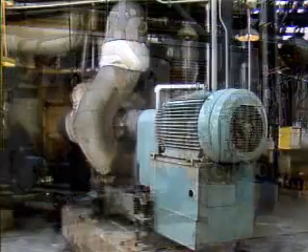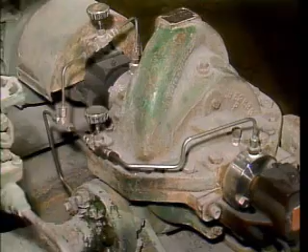Plants use many types of pumps to move process liquids. One of the most common types of pumps in use today is a centrifugal pump. A centrifugal pump uses one or more impellers to create a centrifugal force that pushes the process liquid through the pump. While there are a number of different types of centrifugal pumps, they can be grouped into two basic categories: single-stage pumps and multi-stage pumps.

Centrifugal pumps use centrifugal force to move liquids. Centrifugal force is the force that exists when an object or material moves in a circular motion. This force causes the object or material to move outward, away from the center of rotation. In a centrifugal pump, what moves outward is the process liquid.

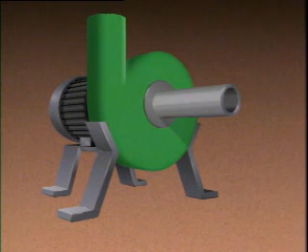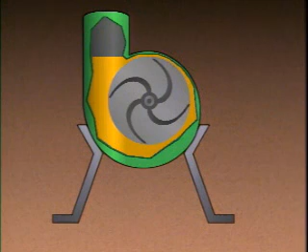We can see how a centrifugal pump works by using this simplified illustration. All centrifugal pumps have an inlet, a casing, and an outlet. Inside the pump's casing is an impeller. It has a series of curved vanes that extend out from its center. The pump's casing is designed so that the area around the impeller creates a gradually widening spiral channel. This widening channel is known as the volute. Since this pump has only one impeller and one volute, it is referred to as a single-stage pump.

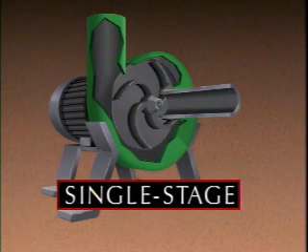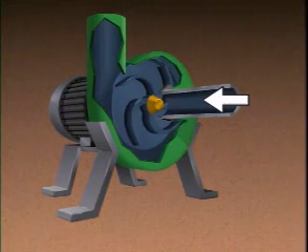During operation, a driver rotates the impeller, creating a centrifugal force that throws the process liquid outward into the volute. The outward movement of the liquid causes two things to happen. First, it creates a reduced pressure area at the suction eye of the impeller. This area of lower pressure draws more liquid into the pump and provides a constant flow of liquid. Second, it causes the liquid to gain speed. This happens because as the liquid is forced to the outside of the rotating impeller, it must move faster to keep up with the impeller.

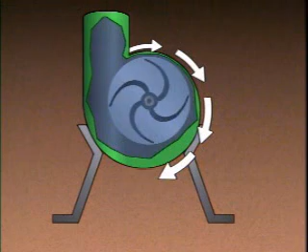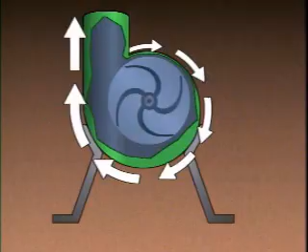As the liquid flows away from the impeller, it spreads out to fill the volute. The expansion in the volute causes the liquid to slow down and its pressure to increase. The increased pressure moves the liquid through the discharge of the pump and then on through the piping systems of the process. One way that centrifugal pumps can be categorized is by the way liquid flows through them.

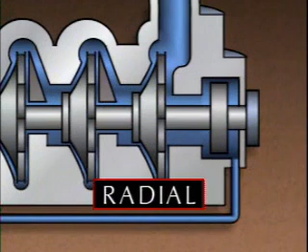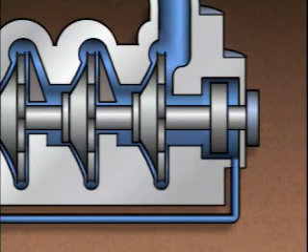Three common flow path classifications are radial flow, axial flow, and mixed flow. In centrifugal pumps that have a radial flow design, the impeller causes the liquid to make a 90-degree turn and flow outward, or radially, from the suction eye to the tips of the vanes. A radial flow pump takes advantage of the maximum amount of centrifugal force that the impeller develops. Generally, radial flow pumps are capable of higher discharge pressures, but they don't move as much liquid as other types of centrifugal pumps.

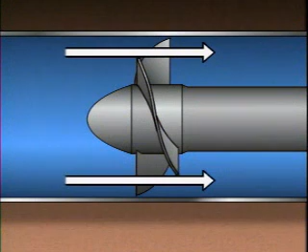In centrifugal pumps that have an axial flow design, the impeller moves the liquid through the pump along a path that's parallel to the pump shaft. In this type of pump, the liquid is moved mainly by the propeller action of the impeller's vanes. This impeller uses only a small amount of centrifugal force to move the liquid. As a result, the discharge pressure of an axial flow pump tends to be lower than that of a radial flow pump. However, an axial flow pump may be able to move large quantities of liquid.

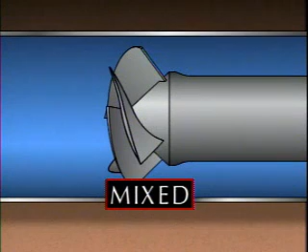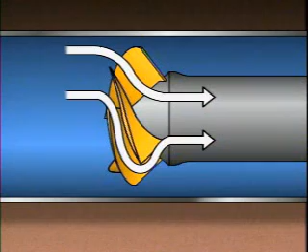Mixed flow pumps combine the characteristics of radial flow pumps and axial flow pumps. They use centrifugal force and the propeller action of the impeller's vanes to move the process liquid. For that reason, a mixed flow pump can develop a relatively high discharge pressure and still move a large quantity of liquid.

The driver, which is an electric motor, is mounted above the pump on top of the tank. Its shaft is connected to the pump shaft by a coupling. This pump shaft is much longer than those found on most other centrifugal pumps. On any pump with a long shaft, it's important to keep the shaft in its correct position.

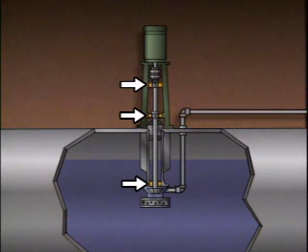So that the pump will operate properly, several bearings are used to keep the shaft properly aligned.

On this pump, there is no suction piping. Instead, the suction of the pump is submerged in the liquid being pumped. The suction is covered by a strainer, which prevents trash or debris from clogging the pump and causing excessive wear.

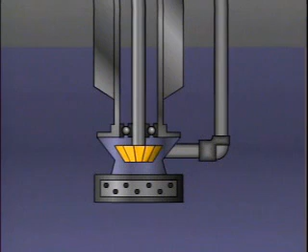The pump's impeller is also submerged in the liquid. This helps to ensure that the pump is always primed, meaning the casing is filled with the process liquid.

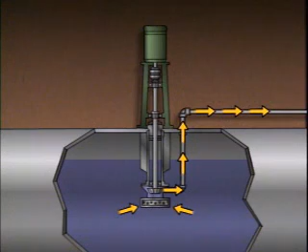During operation, liquid is drawn in through the suction and then pumped through the discharge piping, which extends up and out of the tank. All centrifugal pumps work by creating a centrifugal force. This force moves the liquid through the pump and increases the liquid's pressure.

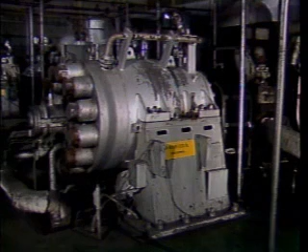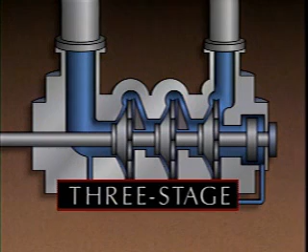In applications where large increases in pressure are needed, multi-stage centrifugal pumps are often used. A multi-stage centrifugal pump contains 2 or more impellers and volutes in a single casing. Here's a simplified cross-section of a 3-stage centrifugal pump. Each stage of the pump has its own impeller and volute.

In the volute, the liquid's pressure increases. Each of the first 2 volutes discharges into the suction eye of the stage that follows it. The 3rd stage volute discharges into the pump's outlet. So in this pump, the liquid flow path is from one end to the other.

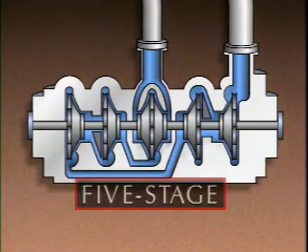This is a 5-stage pump. It has 5 impellers and 5 volutes. The first 3 stages are located here, and the 4th and 5th stages are located here. But as you can see, the liquid's flow path is different from that of the 3-stage pump we just saw.

In this pump, liquid enters through the suction and flows into the impeller of the first stage. This impeller has a suction eye on both sides and is often called a double suction impeller.

From the discharge of the first stage volute, the liquid flows into the second stage suction eye, then out of the second stage discharge and on to the third stage suction eye, and out of the third stage discharge to the suction eye of the fourth stage.

The liquid from the fourth stage is routed to the suction eye of the fifth and final stage. After the liquid passes through the fifth stage, it leaves the pump through the discharge piping.

Regardless of how the impellers on a centrifugal pump are arranged, or how many stages a pump has, the liquid's pressure increases as it passes through each stage. This creates a thrust across the impellers in each stage. This thrust, known as axial thrust, is caused by the difference in pressure between the suction eye and the volute.

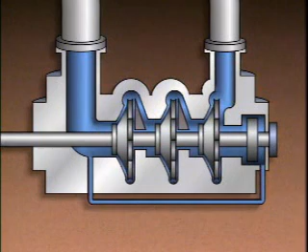Because there is a difference in pressure across the impellers, axial thrust is created, and it tries to push the pump shaft toward the suction eyes. In order for the pump to operate properly, the thrust must be offset.

On some pumps, the thrust is offset by using a thrust bearing or a device known as a balance piston or balance drum. On other pumps, the thrust is offset by the arrangement of the impellers.

This pump has a balance piston. During operation, some of the fluid leaving the pump flows along the shaft and exerts pressure against the balance piston. That pressure tends to force the pump shaft away from the suction eyes and reduces the total thrust. Any fluid that passes by the balance piston is returned to the suction side of the first stage.

Now on this pump, the arrangement of the impellers is used to offset axial thrust. Process liquid enters the first stage impeller from both sides, so the pressures on both sides of the impeller are equal. The suction eyes for the second stage and third stage impellers face in the opposite direction from the suction eyes of the fourth stage and fifth stage impellers.

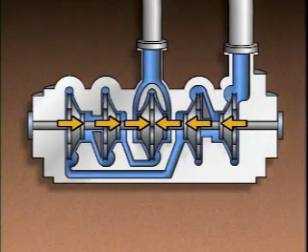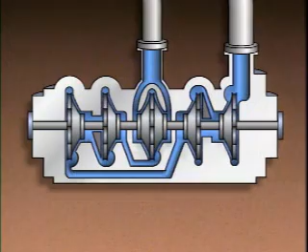The suction eyes of the fourth stage and fifth stage impellers face opposite those of the second and third stages. Since the forces caused by axial thrust are in opposite directions, they tend to cancel each other out. As a result, axial thrust in this pump is kept to a minimum.

In this topic, we looked at the basic operation of several types of centrifugal pumps, including single-stage pumps, vertical pumps, and multi-stage pumps. Now let's try some practice questions that relate to this material.

Inside all centrifugal pumps, an impeller creates centrifugal force to move liquid through the pump. Impellers can be designed in different ways, depending on factors such as the type of liquid being pumped and the amount of pressure increase that's needed.

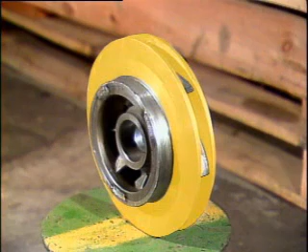The impellers used in centrifugal pumps can be divided into three categories: closed, open, and semi-open. This impeller is a closed impeller. Its vanes are enclosed by shrouds on both sides. The shrouds direct the flow of liquid between the vanes.

Closed impellers are often used with low viscosity or thin liquids. Liquids that are thick or contain suspended solids could clog a closed impeller. With those types of liquids, an open impeller could be used.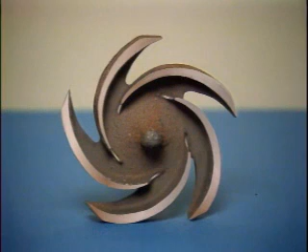This is an open impeller. As you can see, this impeller has no shrouds to direct the flow of liquid. While this design helps prevent clogging, it's less efficient at moving liquids than a closed impeller, since the flow of liquid is not directed between the vanes.

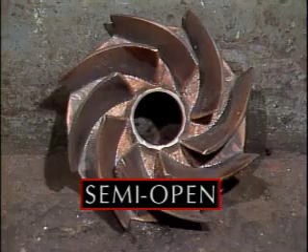Open impellers are used to pump thick liquids or liquids with solids such as slurries, and closed impellers are used to pump thin liquids. Semi-open impellers can be used for pumping thin liquids, since there is a shroud to direct the liquid between the vanes. They can also be used for heavier liquids and slurries, since they minimize clogging.

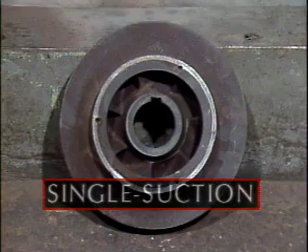Impellers can also be classified in other ways. For example, closed impellers can be further classified as single suction impellers or double suction impellers. This impeller is a single suction impeller. It has only one suction eye, so there's only one place that the liquid can enter the impeller.

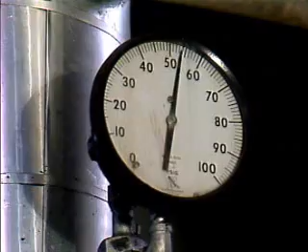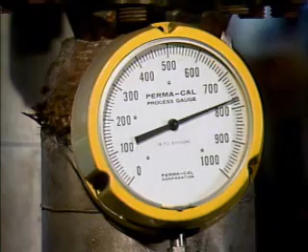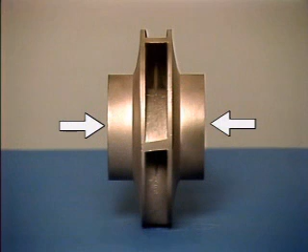Single suction impellers are fine in applications where the pressure change across the pump is relatively low. In applications where the pressure change is higher, large amounts of axial thrust are created and must be offset. To minimize the effects of the axial thrust, some centrifugal pumps use a double suction impeller. A double suction impeller has two suction eyes, so liquid can enter the impeller from opposite directions. Because of this, the pressure on both sides of the impeller is the same, and axial thrust is minimized.

No matter what type of impeller a centrifugal pump uses, the liquid being pumped gains pressure as it slows down to fill out the increasing volume of the volute. Radial thrust is a type of thrust that tends to move a pump shaft perpendicular to its axis. In a pump with a volute, the thrust is created by the difference in pressure across the volute.

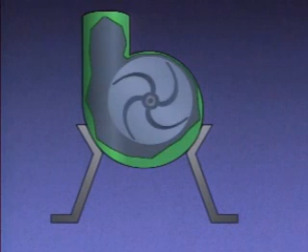Some centrifugal pumps are equipped with a component that accomplishes the same speed-to-pressure conversion as a volute, but minimizes radial thrust. It's called a diffuser. A diffuser consists of a series of stationary vanes that surround the impeller.

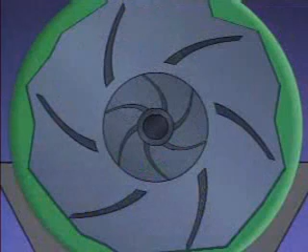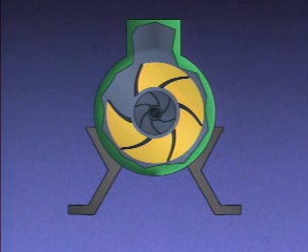When we look at the vanes closely, we can see that the distance between the outer tips of the vanes is greater than the distance between the inner tips. As a result, the vanes create a series of small volutes all around the impeller. This arrangement of vanes balances the radial thrust around the impeller.

Pumps require some type of seal between the pump shaft and the casing to keep process liquids in and contaminants out. Some pumps use packing to seal around the shaft. Other pumps use a device called a mechanical seal.

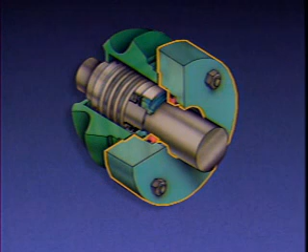On this cutaway of a typical mechanical seal, we can see the two basic parts: a stationary element that's attached to the pump casing and a rotating element that's attached to the pump shaft. Each element has its own seal ring. The two rings are positioned close together to form a seal that has virtually no leak-off.

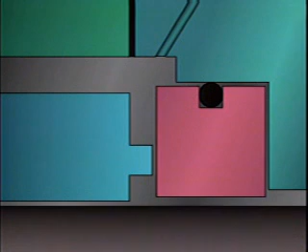To prevent the seal rings from being damaged, some type of lubricant must be supplied to them. In some applications, the process liquid being pumped is used as the lubricant, but that's not always the case. When the liquid being pumped could be hazardous if the seal fails, or if it contains abrasives or other solids, such as in a slurry, an external liquid may be used to lubricate the seal rings.

Many facilities use an independent system to provide lubricating liquid to the mechanical seals of several pumps. This is a simplified diagram of a typical sealing system. It provides lubricating liquid to the mechanical seals on all of the pumps in a process.

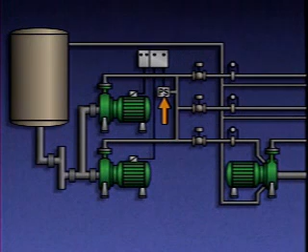The system consists of a storage tank, a filter, a supply pump and a backup supply pump, a low pressure switch, a pressure regulator for each mechanical seal, and a flow meter for each mechanical seal. For this process, an oil is used to lubricate the mechanical seals.

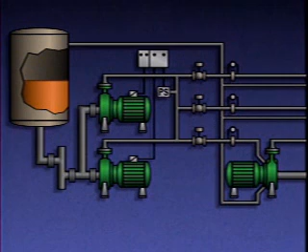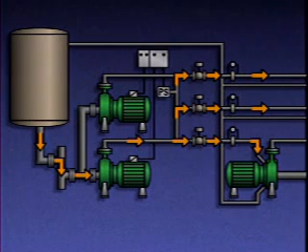During operation, the supply pump draws the oil from the storage tank through the filter. The filter removes contaminants from the oil to prevent damage to the sealing system pumps and the mechanical seals being supplied. The pump supplies the oil to the pressure regulators on each supply line. The pressure regulators control oil pressure and the amount of oil flow to each of the mechanical seals. The flow meters allow the flow to the seals to be monitored.

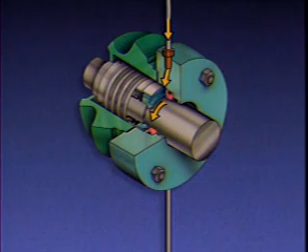If the supply pump fails to deliver the oil at the correct pressure, the pressure switch will sense this condition and automatically start the backup supply pump to restore pressure. At the mechanical seal, the oil lubricates the seal rings. The oil then passes by the seal, flows into the return header, and is sent back to the storage tank. From there, the oil can be reused.